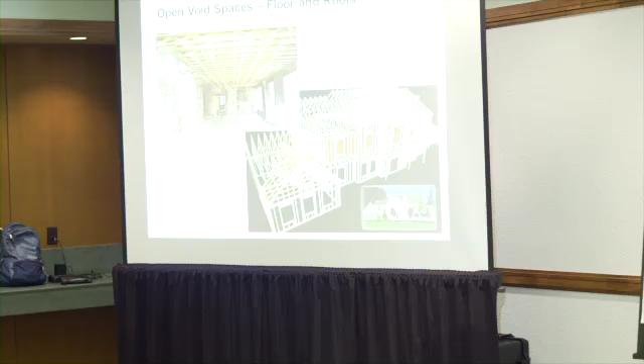You're going to see when the fire actually does transition from a content fire to a structure fire, it's got more fuel available to it in the void spaces, and it's got more air available to it in the void spaces because of the construction practices we use today. If you had a fire that used to start in the void, it would only have oxygen from one joist bay. Now it's got the entire void space to pull from.

But the thing that I'm more concerned with is not the fire that starts in the void space, because that's slow to begin with, but the fire that starts in the contents and spreads into the structure itself is going to take off quite a bit, especially if you look at how our attics work. You've got a whole bunch of fuel, you've got it in a peak shape, it pulls air in low and sends hot gases out high. If you were to build a campfire, that's exactly how you would build it, and that's how we build our attic spaces. That's why attic fires can be so challenging, because you've got a whole lot of surface area and a whole lot of ability to burn and to get air.

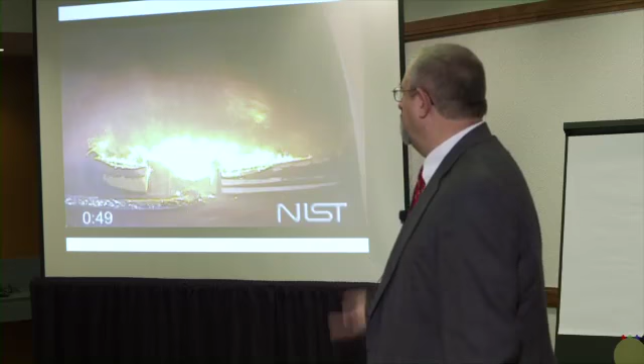Next, we're going to see the radiant heat transfer from the flames start to pyrolyze the sofa and the chair. So we have blue polyester covering on the chair, and you see it turn into a white vapor. That's raw fuel. That fuel's going up into the upper layer, the hot gas layer. The hot gas layer starts to burn. We have rollover. The radiation from that starts to pyrolyze the carpet and every other fuel that we have in there. It's going to entrain a lot of oxygen through the doorway.

There's going to be very turbulent mixing, and we're going to transition to flashover, and then that room's going to do what? It's going to start to darken down because it doesn't have enough oxygen inside to breathe. Where's the fire? It moved outside that open doorway to be an 8 to 10 foot tall flame outside that doorway because it can't breathe in there.

Heat transfer. So what were the conditions inside? What if you were inside that room? Could you survive? Probably not. Sometimes you'll hear people talk about this condition referred to as black fire. That's when the gases are hot enough to be flames, but they don't have the oxygen to burn, and they're getting pushed or moving through a structure.

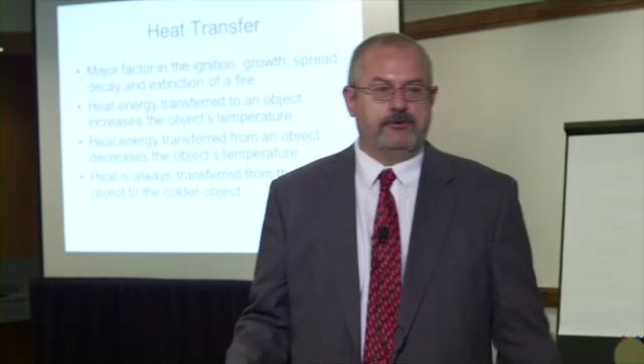So heat transfer. Without heat transfer, you can't ignite anything, you can't have fire growth. At the same point in time, if you put water on something, if you don't have heat transfer, you can't have the fire go out either. So heat transfer is very important. Again, basic physics. There's some laws of physics here. Heat transfer only goes in one direction, from hot to cold. Right? Mechanisms of heat transfer. Again, firefighter 1 type of stuff.

Conduction, convection, radiation. Conduction is heat transfer within solids. Convection is heat transfer between gases or between liquids and gases or gases and solids. So for example, when the fire plume goes and hits the ceiling and turns into a ceiling jet, those gases are rolling the ceiling. It's transferring heat to the ceiling via convection.

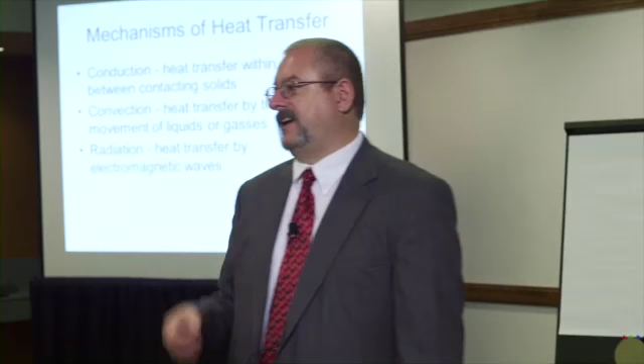Radiation is heat transfer by light energy, so you have to have line of sight. So if you're not directly between the emitter, whether it's the flame or the hot gases overhead, you can shield yourself from the radiation. Basically, if you're standing out in the sun and you step into the shade, right, you got out of the direct radiant light from the sun. Same kind of thing. Showing you a few, not all equations, but a few so you understand the process.

So this is convection. So that Q dot in scientist lingo is heat rate, heat transfer. And it equals a convection heat transfer coefficient, H, times the difference of T hot versus T cold. So in this particular case, T hot are the gases coming off that fire, and T cold is the initial wall temperature. And then the last thing we multiply by is the area of the target, or the area of the wall. Now that wall could be you in your turnout gear, right? You could be the target for that heat.

So one thing you notice right away is that Q dot is going to be bigger if the difference between T hot and T cold is bigger, right? So let's say you were 70 degrees when you went in there and the fire environment's 150 degrees, well, that piece in between would be 80. Well, if it's 400 degrees in there and you were 100 degrees by the time you got there, now our delta T is going to be 300 degrees. So you can see a direct relation there that if you go into a hotter room, the heat transfer between you and the hot gases in that room is going to be larger.

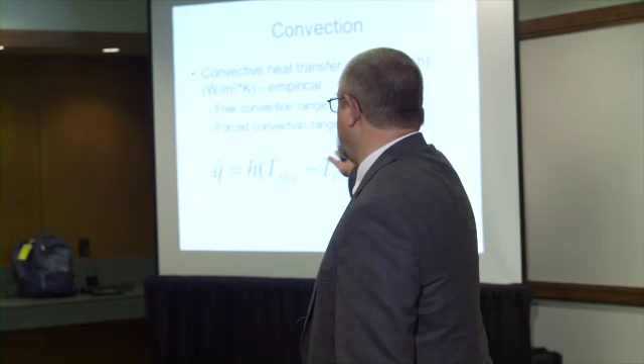So again, when we have forced convection, it could be anywhere from multiplying that delta T by 10, and 500 is sort of the rear end of a jet engine. So that's another extreme. But the key thing is, if that Q dot gets bigger, it's not good for you.

How else might we use this? This is a good thing to keep in mind. Let's say that you show up at a fire training event, and some person, could be an experienced person, could be a scientist you never heard of before, says, you know what, I think the best idea is when you've got flames rolling the ceiling, let's put the water on the floor. I'm going to show you.

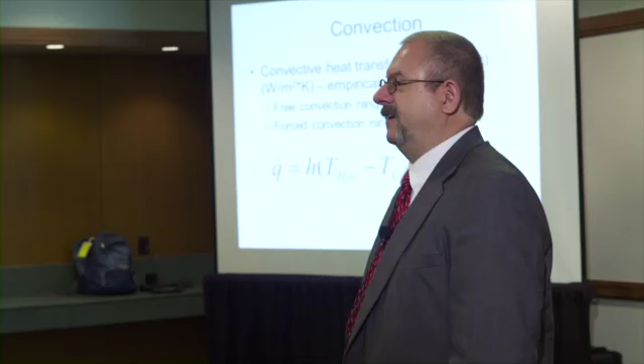We're going to go in this 20-foot sea tainer, and look, the flames are rolling the ceiling, and I'm going to get down here, and I open up the hose line, and the water goes on the floor, and the fire went out. And you might walk away saying, damn, fire went out. That's pretty neat. Well, that was in a sea tainer, right? Let's look at the physics.

If you want to increase your Q dot, if you want to increase your heat transfer, where do you want to put your cold water? You want to put your cold water in the hottest places possible. So if you've got 1,800 degree flames up here and 400 degrees down at the floor, where do you want to put your water to make the most sense? Right? Get it in the hot stuff.

Now, that said, if you've got a small room, maybe it doesn't so much matter where you're going to put the water. Just get the water in there, right? But just something to think about as you hear different things over time.

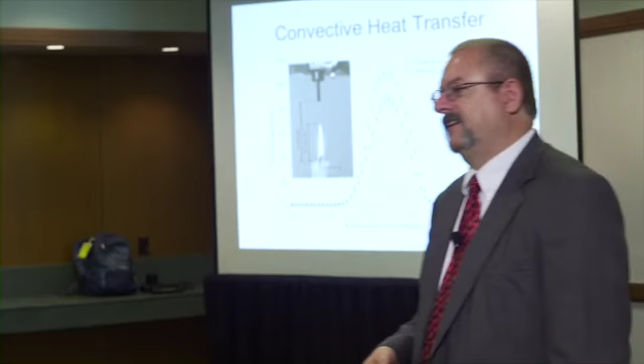Convective heat transfer, back to the candle. If we take a candle and we make a measurement over the candle, you see our sensor there is within about 1 inch of the candle flame. As we move the sensor over the center line of the candle, we're seeing 80 to 100 kilowatts per meter squared of energy, which is why you can light many things on fire with just a small open flame. Very close to it, right in its center line, has a tremendous amount of energy.

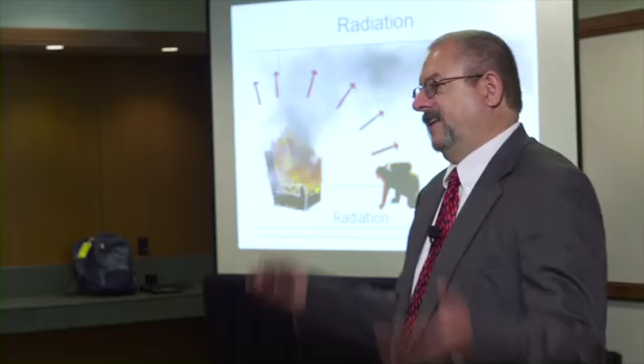So let's look at our threats, our hazards. We have an early growth stage fire showing there. There's an open door where fresh air is coming in behind the firefighter, and radiant energy, a little bit's coming from the chair and some is coming down from the hot gas layer. That's transferring energy to the firefighter.

Convection, again, early stage. This is sort of the ideal situation here, where the convected air that's coming in the door low is actually cooler than the fire environment inside, and that's helping take some of that heat that was transferred by radiation away from you. So that's a good thing.

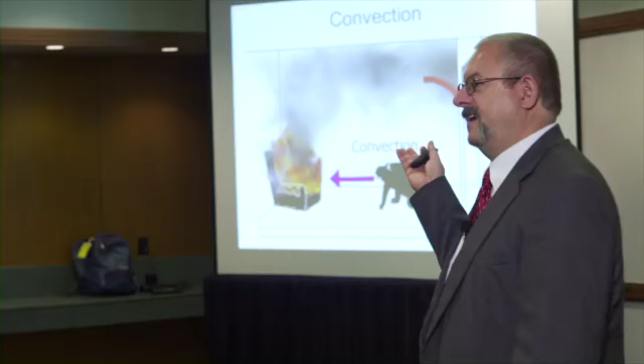But notice where the high heat, high pressure gases are exiting out the top. So one might imagine that if you were to be where the red arrow is, that could be bad, right? The heat transfer to you is going to be increasing. So if the hot gas layer comes down to where you are and is flowing over you, you're in trouble.

Conduction. A lot of times we just think about conduction being where you're touching something, your gloves on the floor or on a hot surface, or your knees crawling on a hot floor. But the other thing to remember is, how does your gear protect you? Your gear protects you by absorbing energy and storing it. And then what happens? The gear gets pretty hot. What direction does heat flow? Hot to cold. What's the next cold thing?

You inside the gear. So at some point in time, the gear that's touching and pressing against your skin is going to be conducting through that gear into your body. So when your gear's hot, the last thing you want to do is have it compressed against your skin.

If one of your fellow firefighters gets his trim on fire and you have this temptation to pat it out, to put the fire out, you're really not helping him, right? You're going to push the hot gear against the skin, make the burn injury worse. Cool them off. Throw water on them, get the gear off. You got to get the heat moving away. You want to change the direction of the heat from going to him to going away from him, somewhere cooler.

Firefighting thermal environments. In the green box there, on the bottom we have heat flux, kilowatts per meter squared, and that's the radiant energy. Vertically we have air temperature, which controls our convection heat transfer. So we've got convection on one side, radiant heat transfer on the other side. The key thing to remember is that these two sources of energy from the fire add up if they're absorbed in your gear.

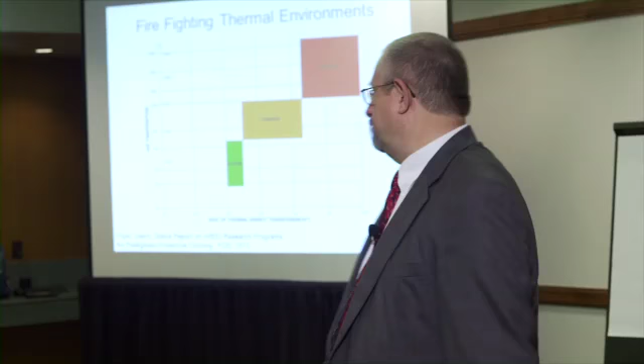So I'm going to show you a couple of films here. We have a chair that weighs 42 pounds. I've got 2 of them in there, polyurethane foam and polyester batting. And here I've got 1 window and 1 door to this compartment that's about 12 feet by 10 feet by 8 feet tall, and the door and the window are both closed.

You're going to watch the fire develop, you're going to watch the smoke grow, and just under the window you saw a couple of squares on the wall. That's firefighter turnout gear that we have instrumentation in.

So the smoke layer comes down over the firefighter turnout gear. What's happening to the fire right now? Starting to run out of oxygen. The hot gas layer is coming down below the level where the fire can entrain fresh air. So if we don't do something quick, that fire is going to go out.

It got hot, it started to build a little pressure, smoke started to force its way around the cracks in the doors. You see it pushing out there a little bit. So we're going to open the door.

The fire was still in the early growth stage, so as a result, what happens? Opening that door works. Hot gases are going out the top. High pressure hot gases going out the top of the door, and fresh air that's at lower pressure gets entrained, basically pulled in by the fire into the lower level.

What do you see happen? The smoke layer lifted, you could see exactly where the fire is.

I've slowed the video down to real time, and watch the lower right-hand corner, and we're going to start to see rollover. When you see rollover, you're going to notice the flames are going to go across, break the interior pane of the double pane window, but not fail the window totally. Notice that the flames are going to burn at the interface of the hot gas layer and move toward the door. They're going to move toward the source of oxygen.

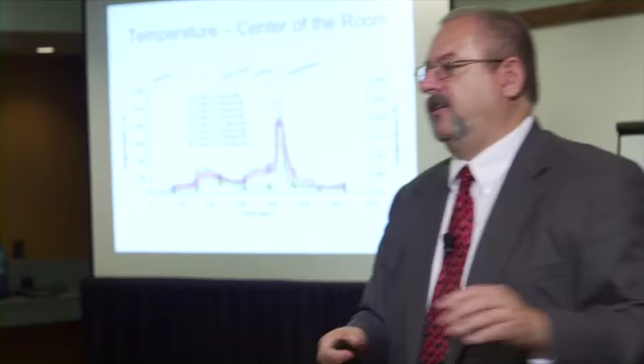Not very good. Notice how the temperatures drop off a little bit until we open the door. Now notice what happens to the graph once we open the door. The conditions separate, right? And you saw it in the video.

We once again have a hot gas layer and a cool lower layer. So the temperatures 3 feet above the floor and down, where you'd be crawling, are ambient conditions, 100 degrees, just as it was that day when we were running the test. That's the outside air conditions you'd be exposed to. And life is good, perfect working environment, fully encapsulated in your gear. You're well protected to work under those conditions, with a little bit of heat flux hitting you, less than 5 kilowatts or so.

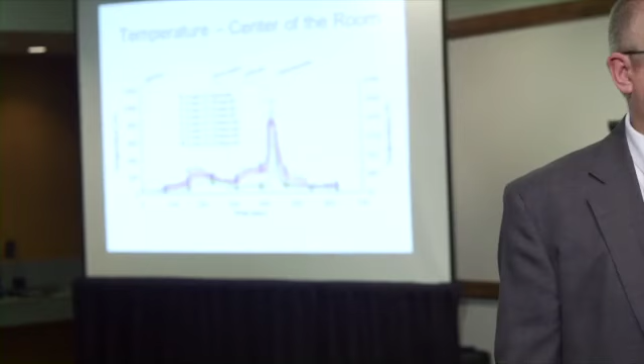Life is good until what happens? Until rollover. Once that rollover occurs and we've got flames rolling the ceiling, the radiation kicks up, the convection kicks up because the hot gas layer comes down, and you see how rapidly conditions change. We go from you being in a safe environment to you being in an untenable environment in about 20 to 30 seconds.

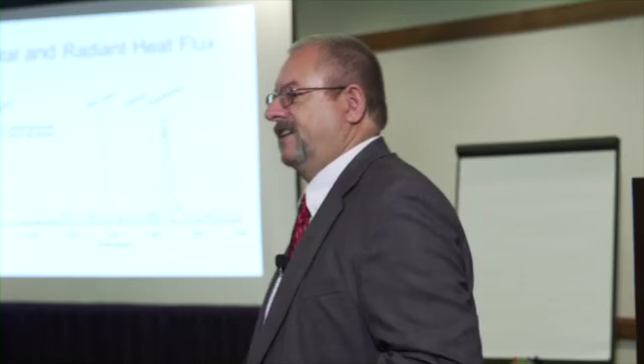So there's a measure of total heat flux, which is convection and radiation added up. That's the blue line, and the green line is the radiation alone. So we get up to 50 kilowatts per meter squared very quickly. Now your gear is tested to what level? Anybody know, in the TPP test? 84 kilowatts per meter squared.

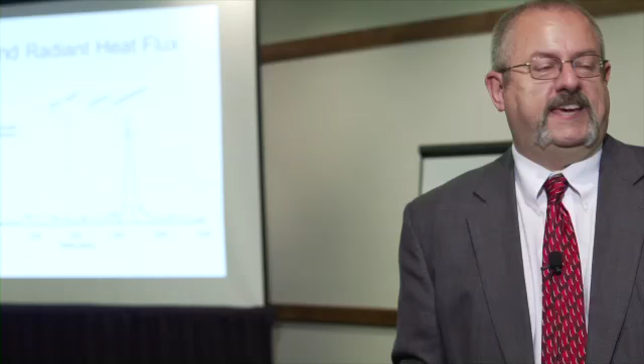Any idea how long you would be safe, or how long you should have before a second-degree burn injury with a TPP rating of 35, in theory? 8 seconds? In theory, it's 17 seconds, but if you assume it's compressed a little bit or dirty, or you got a little preheated before you got there, the key thing is you don't have a lot of time, right? You've got to be moving. If flame's impinging on you, you've got to be moving, and you can see how quickly those things change.

We've started out with an open door, so do you think it's going to go to flashover faster or slower? Slower because it's letting heat out, you think, right? Actually, it's going to be faster, right? Because it's got that continual supply of oxygen to feed the fire.

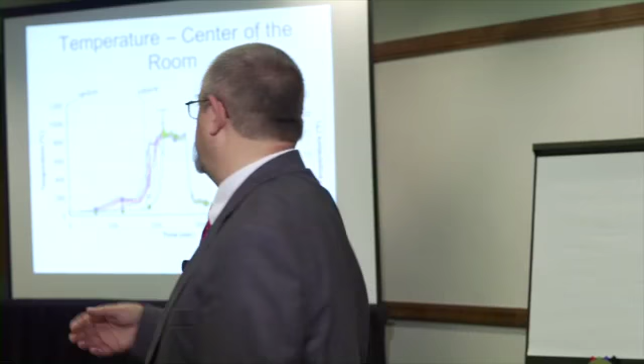So there we see our thermal gradient, our temperatures from the ceiling down to the floor. Initially, temperatures at the ceiling sit around 390 to 400 degrees. Near the floor, conditions are ambient until we have rollover. You see them rapidly increase until we reach post-flashover, defined as temperatures in excess of 600 degrees C or 1100 F, which also happens to be the auto-ignition temperature of carbon monoxide.

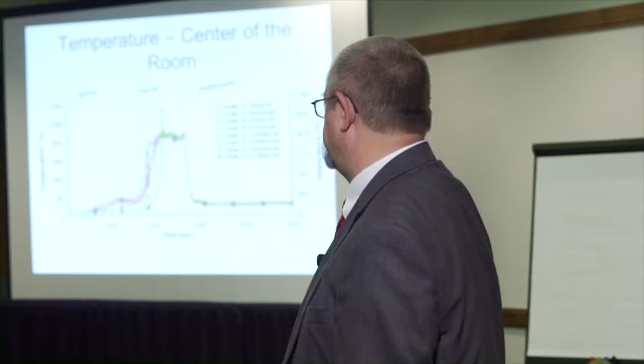So we're sitting at temperatures floor to ceiling in that space around 1500 degrees Fahrenheit. Notice introducing the hose stream from outside drops the temperatures very quickly to about 200 F. Heat flux, again, we're up to about 75 total heat flux. The radiant heat flux is up to about 30 because we allowed it to transition to flashover. The PPE temperatures, you're okay—the outer temperatures are below 200 degrees Fahrenheit. Inside the gear it's less until we have rollover.

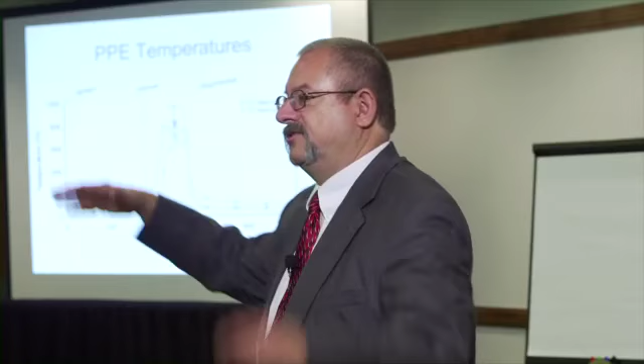So when did the hot gas layer come down over the turnout gear? At around 180 to 200 seconds. You can see it in the graph. As soon as those hot gases start impinging on your gear, your time of safe operating is gone. You need to be moving or changing the environment.

Flow path. So basically, flow path is the volume in a building—a series of rooms, hallways, corridors, or stairwells—that's between an inlet and an outlet.

I got some gray hair in here, so some of you might have been hot rodding back in the day. If you consider the fire structure as your internal combustion engine, with your inlet as the carburetor and your outlet as the exhaust system, if you wanted more energy, more horsepower out of that car, what did you do? First time you got your check from Safeway or wherever, you had to go get some hooker headers, man, and some glass packs. Got to let it breathe, right? Got to open up that exhaust. Got to get that Holley 750—you got to get that big carb on there to increase the flow path, make the engine a better air pump and fuel pump, and let it burn better.

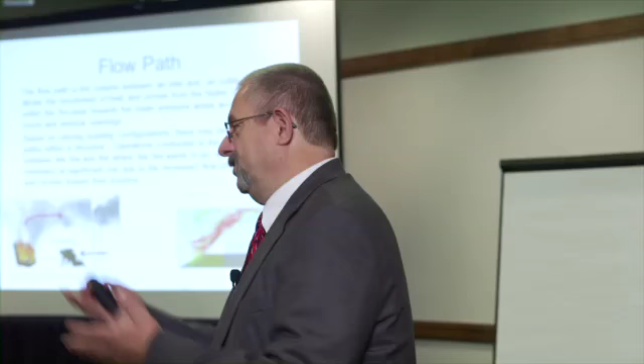Well, that's really what we're talking about here with the structure. Whether you use the analogy of an automobile or a wood stove with the damper controlling the exit of the flow path, and the front door where you're loading the fuel in—it's the same kind of deal, except now we're talking about structures. And when we're talking about basement fires, using that wood stove analogy, now you've got a wood stove made of wood, you're dancing on top of it, and you're going to open the damper and open the inlet and think things will turn out well. So that's really what we're talking about here.

So here's a wind-driven case, the first one I was involved with where flow path became a big issue—Vandalia Avenue in New York City. You look at the apartment building on the downwind side and the upwind side, and you see soot stains that are pretty similar. So one of the questions was, which of these, from outside, is the fire apartment?

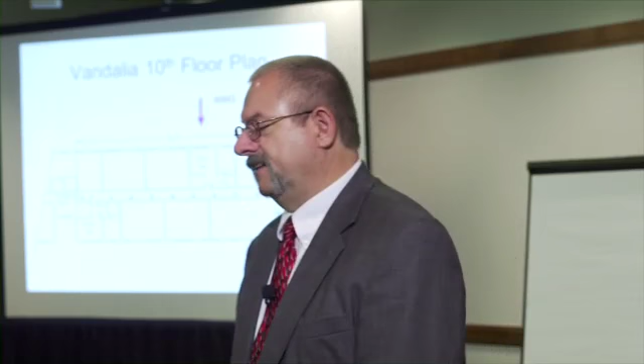Well, the fire apartment was on the upwind side, and a little old lady lived there. She just got new carpeting and was going to have a party, a little wine and cheese get-together with some of her neighbors—this was a senior living facility. The new carpet kept her front door open, which wasn't a big issue for her; it actually worked out for her that night in an odd way. The self-door closers weren't going to get the door closed because of the new high pile on her new carpet. And so the door was open.

Around 11:30 in the evening, one of her neighbors noticed she was relaxing on a sofa in front of these windows having a cigarette. About 4:30 in the morning, the fire alarms in the building go off.

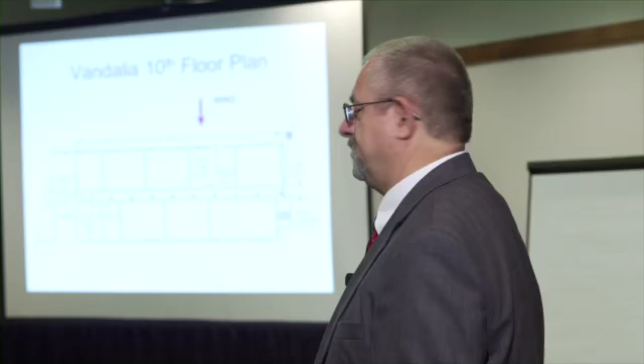There's a lady in the apartment next to the fire apartment, and she calls 911. She's in a wheelchair and needs to be rescued. A crew comes up the stairs, brings her out, and she's treated for smoke inhalation and released that day. There's a little old guy in an apartment down here.

He's getting some smoke in his apartment, and he doesn't like that. So apparently when he's had smoke in his apartment before from cooking or whatnot, what he did to get rid of it was open the windows. Now, this is the upwind side, high pressure, and this is the downwind side, low pressure. Just like hot goes to cold, high pressure always goes to low pressure. So when he opens that window, he creates a flow path, coming from the fire apartment down the hall and out his apartment. So he's getting more smoke in his apartment.

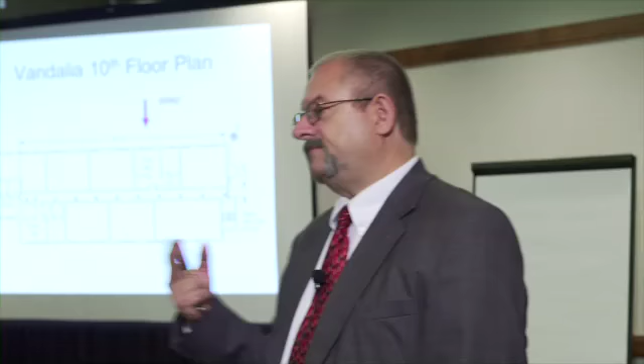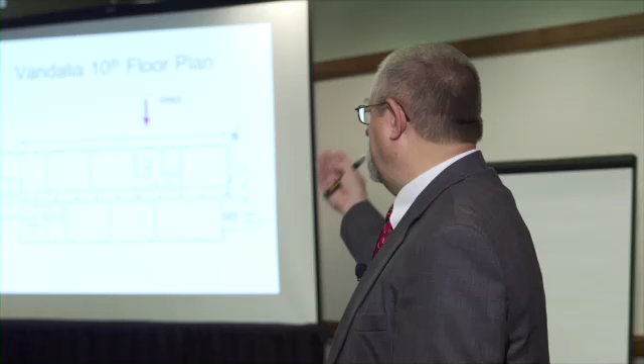Firefighters now open this door again, and as was the practice in New York City at the time, they would send their roof man up to open the bulkhead door and keep it open for the duration of the fire. The roof man was going back and forth telling them about a high wind condition, seeing flame pushing in and out of the window of the fire apartment. Because the bulkhead door is open, when this door gets open now, that's part of the flow path as well. So the first hose crew gets burned and can't advance the line.

Eventually they advance a 1.75 inch line and a 2.5 inch line down the hall, unfortunately not in time to save the other members.

This is what the hallway looked like between the fire apartment doorway and the attack stair doorway. This is looking from the front door into the apartment. Although it wasn't heavily furnished, it had a sofa or two, and basically a wood dining room set, lightly upholstered. It burned long enough to get back into the wall and pick up some foam insulation burning on the outside wall as well. It burned hot enough that it spalled the ceiling planks forming the ceiling of this apartment, so a lot of energy was released.

Before our fire dynamics simulator even had its name, we ran a model with it. The blue box represents the wind, and the fire apartment is right in front of the blue box there. This is the little old man's apartment, and then we have the stairwell on the opposite side. When the window breaks, the fire size is going to increase and smoke is going to start to move down the hall.

Because the roof man said the flames were pulsing in and out of the window, I assumed the wind was fluctuating. So when I modeled it, I had the wind go up to 20 miles an hour and then back down to 0. Every time you see a wind pulse in the model, flames and heat will move down the hall.

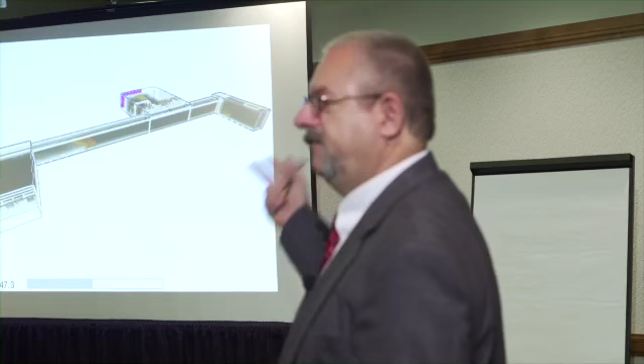In response to the mayday, the door to the stairwell is going to open, and then you'll see smoke and flames move into the stairwell as well, heading toward the bulkhead doorway. So plenty of fuel there. The flame could split. Even though it appeared vented from the street, there was still plenty of fire and energy that put these firefighters in jeopardy.

So 10 years later, we get an opportunity to run a project to really study this wind-driven fire phenomenon.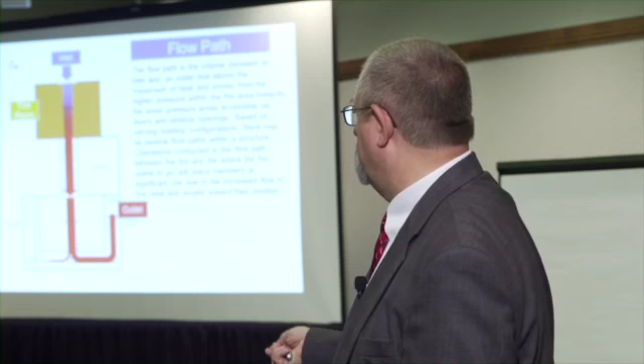As I described a little bit earlier in the class, we have this flow path where basically we have the bedroom, a hallway, a target room here, there's a hollow core door between the target room and this hallway, and then the living room and our outlets, non-flow side and flow side. I'm going to go through this again quickly, reminding you that you only need one piece of furniture to flash over, to have enough energy to flash over a typical residential scale room.

We'll watch this video again. So again, our fire starts here in the bedroom. We have our plume starting to impinge on the ceiling. Ceiling jet moves across the ceiling. Once it hits the walls and forms the hot gas layer, it starts to build up in depth and then spread down the hallway and into the living room. Notice that when it starts to flow out the doorway into this corridor, it's going to head for this vent, right? The flow is very directional away from the camera toward the vent, part of the flow path.

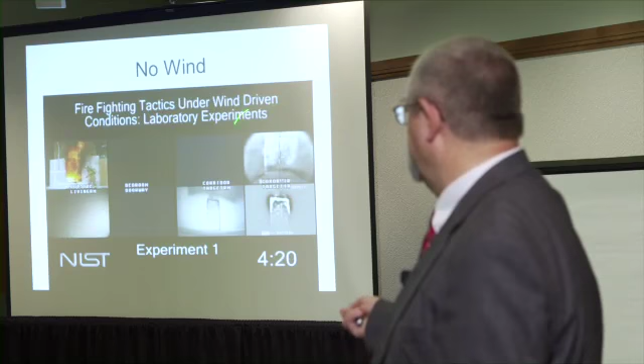Right now, if you were to get there right now and start to make an attack and work your way down the hall to get to the fire bedroom, this is sort of that old school early growth stage. You're there in time. It hasn't gone into a decay stage yet. But now that's transitioning to a decay stage. And as soon as this window, which might fail accidentally or might be ventilated as a ventilation tactic, look at what it does in that hallway. It's no longer a hot gas layer, cold layer environment. Now any firefighter that would be in that hallway is in that hot convective flow. Heat transfer to that firefighter increases dramatically.

We're going to watch the hollow core door fail. Interestingly enough, until that door fails, somebody would have a chance of surviving behind that door. So, from a victim's perspective, having a closed door, doing whatever compartmentation you can, is a big value. Notice how that flame is pulsing in and out. Now this is with no wind.

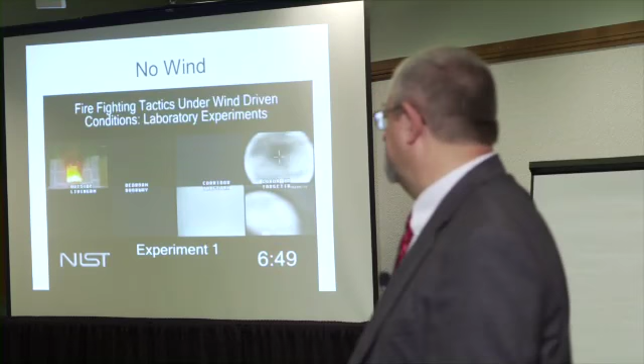So again, very dramatic increase in heat release rate. It goes from about 2 megawatts to 13 to 14 megawatts within 60 seconds. The bedroom temperatures: initially, we had over 1,000 degrees at the ceiling and about 500 degrees at the floor. Once the windows vented, now floor to ceiling, we're post flashover. We have a very well mixed fire going from floor to ceiling in excess of 1,100 degrees Fahrenheit, and it stays that way until suppression.

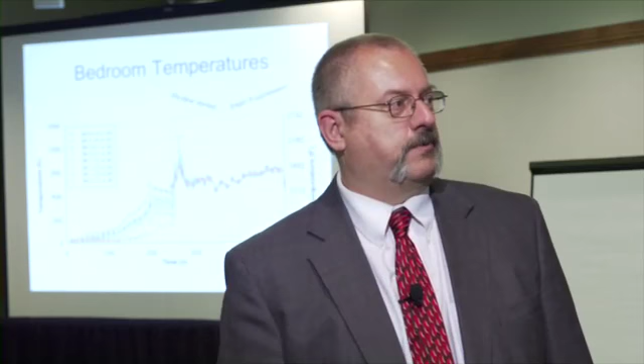The living room temperatures: so what's happening in the living room is there's not really a lot of fire in the living room. Why not? There's temperatures at the ceiling that are about 700 degrees. They're pretty warm. So what's going on is the temperatures and the heat flux in the living room are hot enough to start to pyrolyze the furniture and the carpeting that are in the living room. So gaseous fuel is being created, but it doesn't have any oxygen down there to burn. Then when we vent the window, it starts to pick up some oxygen, but it's still burning pretty inefficiently because, you see, we're not post-flashover yet. We still have a temperature gradient. Although now the ceiling temperatures are about 1,400 degrees Fahrenheit, and near 1 foot above the floor, it's about 800 degrees Fahrenheit.

When that door fails to the target room, the chunk of oxygen that's stuck in that target room gets pulled out into the hall, and that's what causes this increase in temperature here, and then we sort of transition to our flashover state.

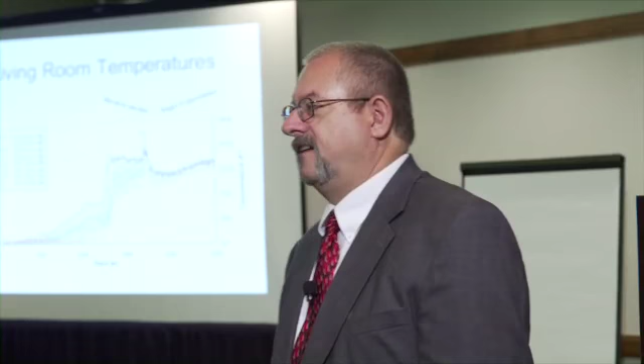The velocity in the hallway: high pressure wants to go to low pressure. So initially, with that window in place, we don't have this big exchange between high pressure and low pressure, and we just have the ceiling jet that's going across the ceiling at about 9 miles an hour or so. Once the window's gone, we have this well-mixed fire environment, high pressure in the bedroom, forcing its way to the low pressure in the living room, so the conditions in the hallway, floor to ceiling, are now somewhere between, say, 8 miles an hour and 12 miles an hour.

Right? So this is that H factor in that convection heat transfer equation that's increasing the heat transfer to any target that's in that hallway. Living room, gas concentrations at 6 feet. This is oxygen. The red line is oxygen. The yellow line is carbon dioxide. The sort of triangles here, this green line is carbon monoxide, or CO, and then this purple line are the total unburned hydrocarbons. This is the excess fuel that's still in the living room to burn.

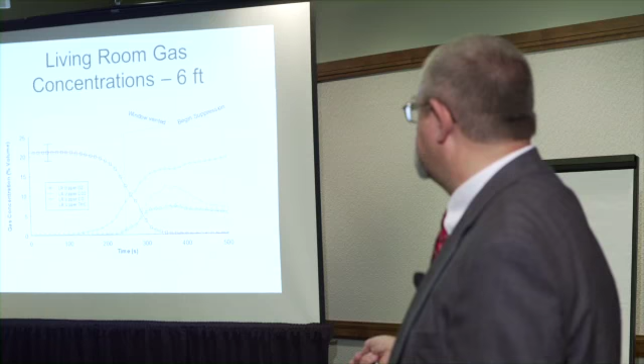So you can see the oxygen concentration went way down, CO2 way up, CO way up. So the CO is sitting at about 6%. That's 60,000 parts per million. So when you get to about 3% CO, that's one breath that will drop a person in their tracks, an unprotected person. What about at 2 feet above the floor in the living room? Well, we still don't have a lot of oxygen down there. Our CO2 is above 15%, and our CO is in excess, again, of sitting around 6%. So very unhealthy environment for all involved.

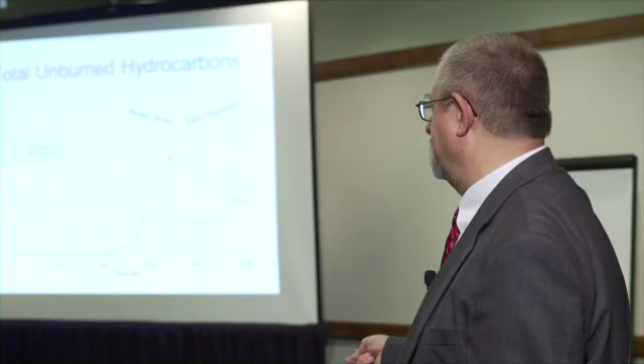Total unburned hydrocarbons in the living room, we've got about 12%. So again, there's more. If it just had more oxygen, it could burn those unburned hydrocarbons, right? The heat is there, the fuel is there, it just needs more oxygen to burn. So if you vertically vented that room, what would happen? It would burn hotter. The heat release rate would increase. If you broke an additional window on that room, the heat release rate would increase because it's got excess fuel to burn and it's already preheated, ready to go.

Now we're going to add some wind. So in this case, I'm letting you look at the inlet, which is the window, and the outlet, which is the door from the fire apartment to the corridor. I've got a 20-mile-an-hour wind, steady wind, hitting the side of that building. Notice that in the corridor we have a nice 2-layer environment, which are good working conditions for a firefighter. Look what happened when the window broke. Look at how rapidly that changed. This is playing in real time.

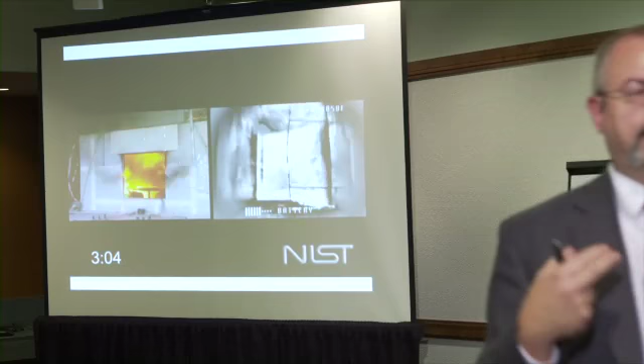What do you notice about the flames at the window, even though I have a steady 20-mile-an-hour wind? They're pulsing in and out, just like the roof man from Vandalia said. The key thing is we didn't understand it at that point in time. The pressure is so high in that apartment, it can't force it all out through the exit, so in effect, it's burping itself to relieve the pressure and then sucking back in the window.

Here's another case. In this case, the apartment door is closed. Right? So you'll notice that with the apartment door closed, this is having a hard time even failing the window, right? Because the pressure is bottled up in that fire apartment. So now we break the window. It's still burning very inefficiently. It's having trouble breathing. And the apartment door is providing protection. It's cutting off the flow path. You can see the leakage, and there's a lot of energy on the other side of that door. You can see that with the thermal imager.

Now the key thing here is, this might be the sort of situation where you get your crew, you'd have your line charged, and you say, okay, we're going to get low, we're going to pop the door, and we're going to go in. And that would really be a disaster because you see the kind of thermal assault you're going to take right in front of that door. And flowing a line, unless you can get the fire gases where they're originating back here, you're not going to have a lot of impact on that. You'd be much better off introducing water from this side, either with a high-rise nozzle or a wind control device to cover it, to cut the flow path, things that New York is working on.

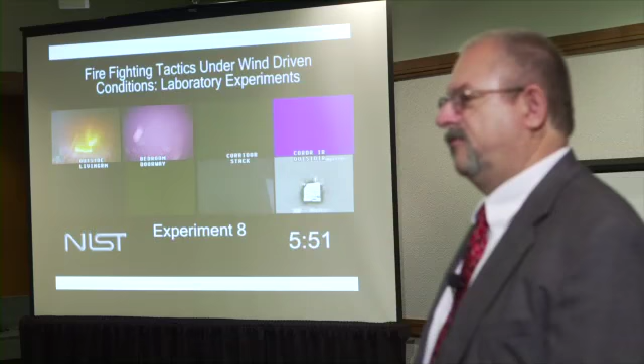So we're going to watch it develop. Everything's darkened down inside the apartment itself. We see some flames coming up into the stack, and now we're going to ignite the gases that are residing in that stack before they can get sucked up our 6-foot diameter hood. The fireman's getting ready to introduce some water at the window. There it goes. What happened to the fire in the hood? Gone, right within seconds. Now you look at the video view of the room and you say, wait a minute, there's still a lot of fire in that room.

Well, there is, but really you'll see as the bedroom view starts to improve for us that what we have now are a lot of incipient fires. We've got the remains of a couple of chairs in front of the window that are burning. We've got the remains of the bed that are burning. A dresser is burning. But what you've taken out of the equation is this reservoir of hot gases that was burning from one end of the apartment all the way out into our hood. Right? That's been neutralized, taken away just by this hose stream.

And you see the view is cleared up in the bedroom view. And then he stands up and knocks the rest of the fire down. So again, taking those fire gases out of play and bringing it back to the fact that you might have just a sofa burning or a chair burning or something like that, that's something you can go inside and deal with.

So then we moved into a high-rise, and we went to Governor's Island in New York, and we went there in February because it's cold and windy, so the weatherman says, and history says, about 90% of the time. The whole time we're pulling wires, putting up our instrumentation, loading furniture into the building, very windy, very cold. Then we got a snowstorm, still remained cold, but the wind stopped. So we brought our own wind, and we had the good fortune to have some squad guys take this fan off the back of the manufacturer's pickup truck and lash it to this boom lift, and we put it up 60, 70 feet in the air. So we had our good wind. Again, we're using real fuels. And then we start demonstrating things.

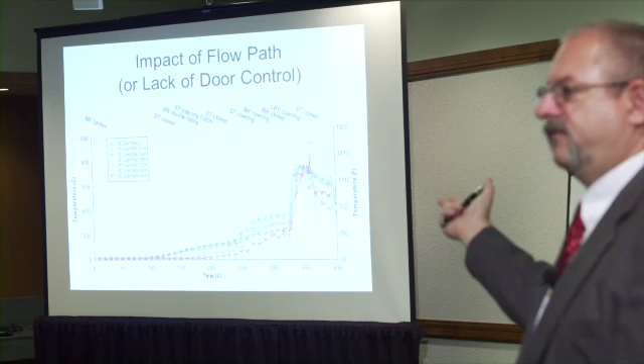Very rapid transition. This isn't just a high-rise issue. Single-family homes. Here's an incident that happened in Houston. Killed a captain, very experienced captain, more than 25 years on the job, as well as a young firefighter who was 30 days on the job, and this was their first fire.

The wind was coming from the rear of the structure, and there was so much smoke in the street in front of the house, and when the fire department arrived, fire sort of happened in the middle of the night, the engineer stopped because he didn't want to hit any parked cars. He wanted to get a better view of where he was going. And then he took the apparatus down the street past the house. They hooked up to a hydrant, and the lines start going in the front door on the low wind side.

Now, this was a very difficult house to gain access to the rear. Again, some confusion about whether people were in the house or not. In fact, the occupants were out of the house, and they had opened the garage door to the house to get their cars out. So again, another opening on the downwind side.

So here's the front door. The nozzle from the victims was found here. Their line went down the hallway. Their nozzle was found here. And the 2 firefighters' bodies were found in this location here, so they were well off their line.

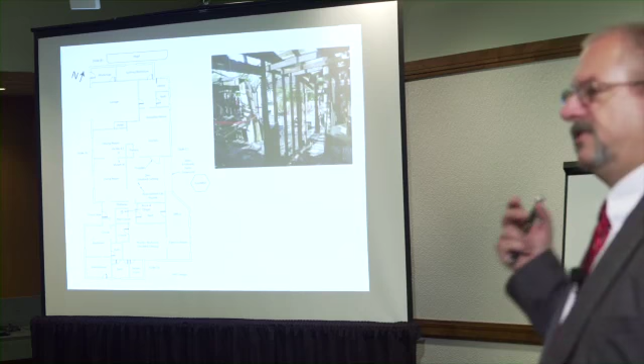Another engine company was in here. They were flowing water in this area here. They were hooking the ceiling, and as they were getting basically chased out of the fire by high heat conditions, they noticed that they could see these guys' boots back here, that they were still standing at that point in time. The big change in this case was, again, failure of glass.

There was a glass patio back here, and when it failed, that changed the flow path, right? That was our inlet, and the exhaust became through the downwind side. The fire had started in the attic. This was an older house, had been added on too many times. In some cases, it actually had a double roof, so there were asphalt shingles actually in the attic providing additional fuel. And you can see how it burned away there.

A ladder company was on the roof, and they made some cuts right in this area here. The ladder captain says as soon as they made their first cut, fire came out of it. They kept cutting and did a good job and opened up the space. And he said he looked to the rear of the house, and he noticed that there was a flame overlapping the eaves that was about 1 or 2 feet wide.

As soon as they were done with their cut and punching down the ceiling, he looked back again, and now he saw that that flame overlapping the eaves was about 20 feet wide. Well, that's because all that glass, solarium glass, had failed. So again, we're modeling this fire to try to get some understanding of what the flow path looked like and what happened. In our models, we include the roof vents. We try to get the whole timeline down for when they're pulling the ceiling and that sort of thing.

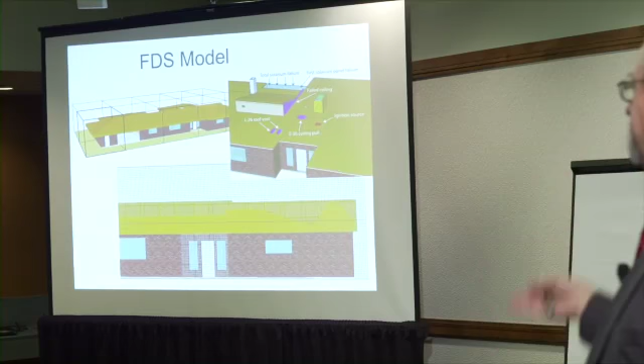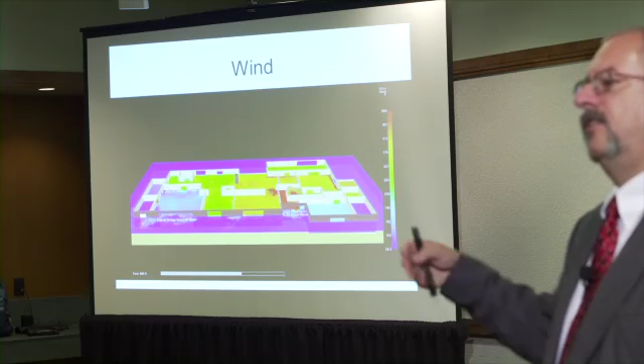So the front door is open. They open the door, and then what do they do? Well, you got to get your mask on, get your helmet on, whatnot. Again, this is an issue. When are you making the vent? Right? You don't want to vent till you're ready to take some action. Or if you're going to open the door and take a look and you see conditions aren't so good, close the door again. Right? Don't allow the fire time to build up by entraining more air.

So things are heating up. In fact, opening the door, you're going to see when they make the roof cuts right in the foyer area, it'll cool off a little bit. They'll get a little bit of lift.

So now the roof is vented. It cools off a little bit in this area. Things are working. And then the glass fails, and now you see where the heat's going.

So they couldn't stay on their line and follow their line out, probably if they wanted to. They went to an area that was not as hot. It just wasn't cool enough for them to survive.

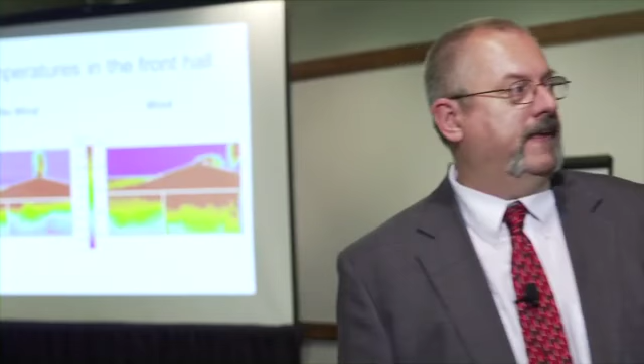So this is a side view looking at the front entry. The view on the left is before the wind is impacting it, so you see it's cooler close to the floor—you could crawl in and under there. Once the wind is blowing through the house, it's dropping the heat, mixing it toward the floor. You can't get low enough to get out of the thermal flow.

Perhaps more importantly is the velocity of that hot gas. Before the window breaks, 3 feet above the floor or so, fresh air is being entrained inside that front door, bringing cool air into the house, also feeding the fire. But if you're in the location of the doorway as a firefighter, it's going to help you—it's going to help keep you cool.

Once the glass breaks, notice what happens. The flow reverses and hot gases are coming out at that same location. Again, no escape.

So wind—keep the wind at your back, stay upwind. Otherwise you're literally putting your crew at the mercy of whether this glass, which is less than a quarter inch thick, is going to break while they're in there, or whether somebody from another company in an uncoordinated manner makes a vent and puts them in harm's way, puts them in the flow path.

Again, just a top-down view. This is the direction of the wind, out to the front door and out through the garage. So they couldn't go this way, they couldn't go this way—there were security bars on the windows here. They got to the best place they could and couldn't get any further.

Again, you'll see where the flow path is because that's where most of the burn damage will be, because that's where the oxygen's mixing with the fire. So it brings us to some questions about ventilation: can you really vent enough?

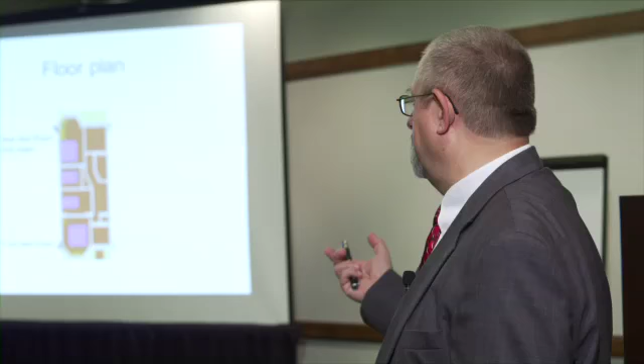You can see that in the rear room, the fire had been burning for some time. It failed the gypsum board ceiling, it got up into the cockloft space, and it had heavily charred the wood joists that were supporting the roof. Again, the worst place to have fuel is in a place where it can't really burn very well. It just pyrolyzes and creates a tremendous amount of unburned fuel. So fuel at the ceiling, the hot gas layer is there. The hot gas layer is oxygen depleted already, and that's creating a lot of fuel to move elsewhere.

Here's the front room where the firefighters sustained their injuries. Again, it went to a post-flashover condition, but as you can tell from the lath still being in place, not for a very long time.

This is the stair where the line was brought up. And this window, again, you see we had bidirectional flow in the window. Hot gas is out top, cool gas is going in, which aided in Rob Weedman surviving. That the fresh air was coming in to cool him off. What little benefit that was, it was still some benefit. It helped. He got his face out the window, so his face piece remained pretty much intact with just some small damage to it.

So again, we put in our model, we developed the timeline. Again, we're following from what we have from the Fireground radio and the radio traffic. So basically, before ventilation, we've got the fire here in the rear upstairs. After ventilation, you see that the smoke layer in the stairwell went up, but now we have flames at the ceiling, and we also have flames through all the bedrooms here as well.

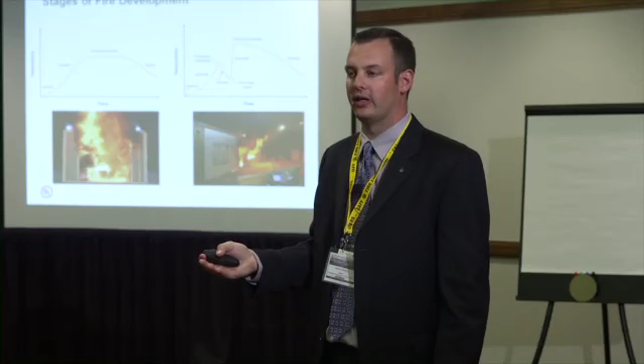Stages of fire development - Dan hit on this morning. We have to consider air into our stages of fire growth. And ultimately, this is pretty simple. We're going from ignition to growth. The fire runs out of air, starts to decay - our initial decay period. An opening gets made, let's say the front door gets opened. The fire responds to that oxygen and the fire takes off.

All right, let's step it up a notch. Two things are happening: the front door is getting opened and a hole's getting put in the roof. That's what that looks like. The fire grows, it goes into additional decay. Front door gets opened, provides air to the seat of the fire, fire increases in size.

But again, it hits a limit, right? It's only getting air through the front door. It wants to burn more than the air it's getting through the front door, but it's limited, it's fully developed.

But then we go ahead and we open the roof. So now what are we doing? Well, we're allowing more air to come in through the front door, so our fully developed energy is actually higher. So now we've got fire coming out of the roof and fire coming out of the front door, and that fire still has more fuel. You make another opening, it's going to step up again until you interrupt it with water.

And that's what's happening at the back end here. Hose line goes on the fire, we go into the decay stage, and we go ahead and put the fire out.

So that's just two actions on the fireground, or what the fire growth stages look like, for opening the front door, opening the roof, and putting water on the fire.

Had an incident in Prince George's County. Won't go into too much detail on this, short of saying small house, little to nothing showing, very small fuel load in the house, an issue with the hose line causing a delay.

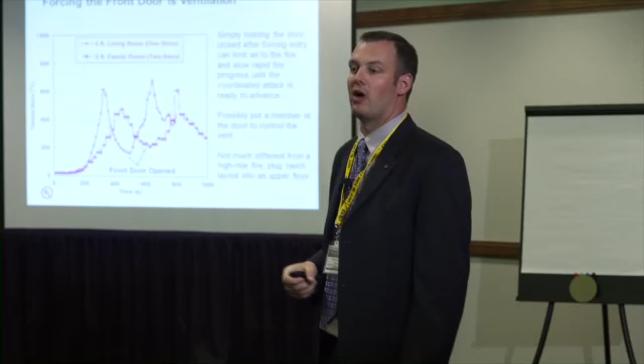So that leads us to start talking about door control. If we can limit the air that's making it to the fire until we get water on it, then we're doing positive things. We're not allowing that fire to grow.

Here's a short video that shows that not controlling that door until you have water ready to go will result in a bad outcome. The fire is not waiting for you. And there she goes.

How many times do we see chief officers show up on the scene, get the front door open, or the occupants leave the front door open? And we assume that, man, they saved us the issue of forcing that front door. It's wide open already. We do our 360, and while we're doing that 360, that door's wide open, feeding air to that ventilation-limited fire, allowing it to increase in size.

If you can limit that air, I'm not saying don't force the door and check for any occupants that might be inside the front door, but until you're ready to actually go and commence your attack on the fire, you need to limit that air.

So we looked at the concept of door control. We did two experiments side by side, where the first one, door all the way open, what we would normally do, chock it open, it's all the way open, line goes through the front door. Second one, we opened it all the way to allow the crew to go in, and we simulated having a guy at the door hold the door closed as he's advancing line that closes the door about two-thirds of the way, so that line can run straight in.

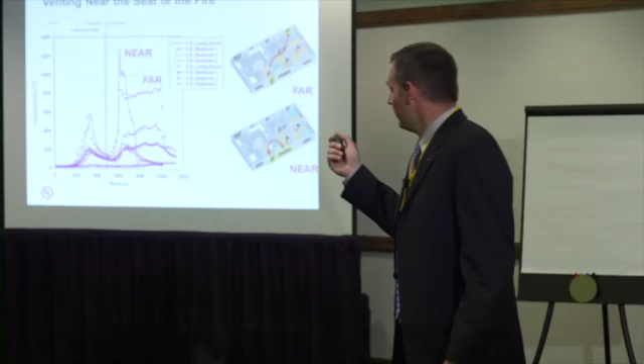Venting near versus venting far. Here's another one. We always teach you vent near the seat of the fire. Why is that? Well, because it lets the bad stuff out quicker, right? The caveat that they forget to leave out, and then we commonly don't address in our training, is that venting near the seat of the fire is good if you're putting water on the fire. If you're not putting water on the fire, venting near the seat of the fire is the best way to make the fire the biggest, the fastest, because you're giving it the oxygen right where it wants it. So if you want to take a fire that is ready to go to flashover and really make it flash quickly, give it air right near it.

Or if you want to spread the fire to the other part of the building, go ahead and vent far. It's going to take longer for it to happen because you're going to have hot gases that are going to roll the ceiling, go to the low pressure that you created, right? Fire's a pump. It's creating a high pressure. Anywhere you create a low pressure to the outside, that's where those hot gases are going to go. So the hot gases are going to travel out the vent.

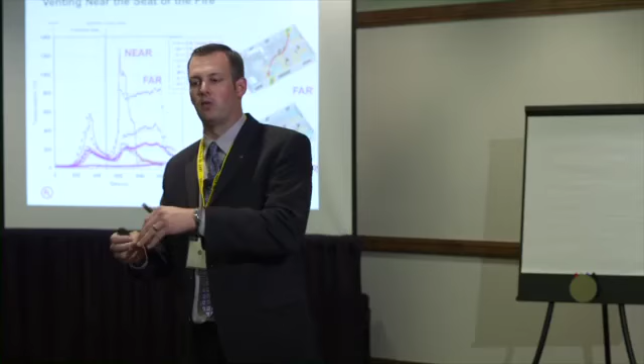As soon as the temperatures get hot enough in the room that they're leaving to ignite something, that room will quickly go to flashover. And then you successfully move the fire from one room to the other room. If you're putting water on the fire, venting near the fire is the best thing because you're taking the hot stuff, the high pressure stuff, moving it to a low pressure, and getting it out of the house as quickly as possible, which makes your job easier.

Reading smoke. Here's another one that maybe is not so obvious, right? So we get a fire inside a structure that's creating a high pressure, so it's pushing smoke out of every crack it can possibly push smoke out of, to a point. And that point is when the fire runs out of air and begins to decay and the temperatures go down, the pressures in the structure actually go negative. So it might be 500 degrees inside that house. It's going to have a negative pressure because it's trying to suck oxygen from anywhere it possibly can.

In the grand scheme of things, these are things that we would interpret as backdraft conditions, where you see some smoke pulsing in and out, and then all of a sudden, you've got nothing showing whatsoever. So the message here is, if you get on the scene and you've got nothing showing, don't get complacent. If you've got smoke in the area, you may have a fire that was in the growth stage, ran out of oxygen, went into the decay stage, and it's waiting to get opened up.

And the moment it gets opened up, it's going to get the oxygen at once. And because of the timelines we're dealing with here, you're not going to get a backdraft. You're not going to get an explosion unless it's been burning for a really, really long time. But air's going to go in, fire's going to grow, it's going to go to flashover.

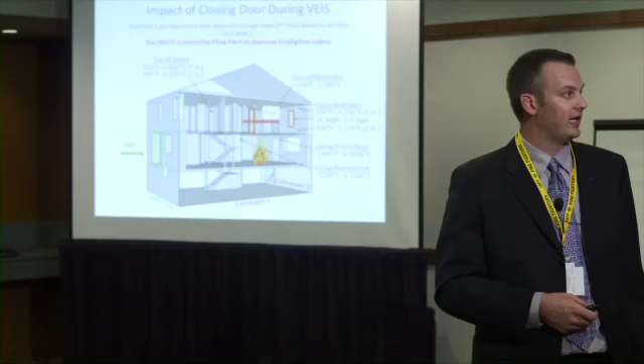That takes a lot of time, and those of you that have practiced it know it takes a lot of time. You don't have a lot of time, so you need to maximize the time you have to get that door shut. This just shows the impact of closing that door. And you can see here that in the open bedroom, we take the ceiling temperatures from 450 to 150 immediately after shutting that door. The flow goes from 12 miles an hour to nothing.

Dan talked earlier about convective flow. That 170 at the floor with a 12-mile-an-hour wind feels a hell of a lot worse than 170. But with 0 miles an hour and 120, you're now talking something that you can operate in. Best chance of victim survival and firefighter survival is behind a closed door.

You could have, and Dan and I have seen this on many experiments, you can have the entire front half of a structure absolutely blowing fire. And if somebody's behind a closed door, let's say on the CD corner, there's a chance that there's a savable life inside that room. They put a closed door between them and the fire.

Same thing happens if everything goes to crap on you guys and you find yourself having to bail out. One of the best things you can do to buy yourself time is to get a closed door between you and where the fire is. Takes you out of the flow path, allows the room that you're in to actually ventilate and allow the smoke to lift. And if you get to a window, you actually have time until that door burns through to have someone get a ladder to you and allow you to go out through that window.

We've got a number of cases where firefighters have bailed out through windows on upper floors, and the thought of closing a door wasn't in their head. They're thinking, this is so bad, I got to get out that window. And I've never been in that situation, but I can imagine the last thing you're thinking of, unless you train on it, is getting a door shut.

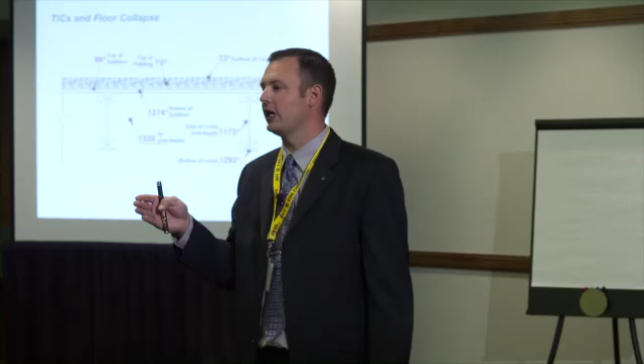Thermal imaging cameras, not an X-ray device. They're a surface temperature reading device. If you get onto the first floor and you think you're going to see that you have a fire below you simply by scanning the floor, unless there's a penetration between the basement and the first floor that hot gases are flowing through, like gaps in the baseboards or HVAC vents that burn through, your thermal imaging camera is going to tell you that it's 73 degrees on top of the carpet, even though it's 1,300 plus degrees in the basement.

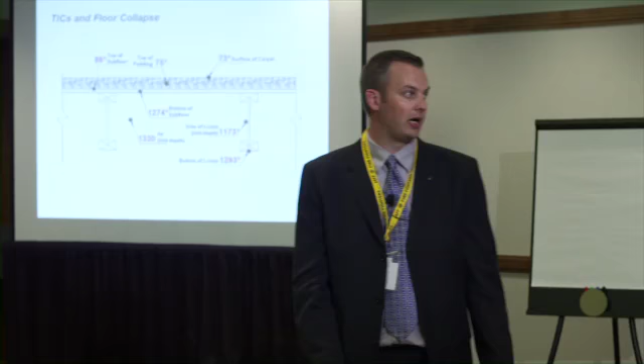Wood, carpet, hardwood, tile, all these things are very good insulators. They're very good at hiding heat signature. They're going to hide the signature from your thermal imaging camera. Here's an example that shows you there's a fire underneath this floor, and this is just a training exercise that got set up. He's going to go ahead and make a hole, and now you can see that there's high temperatures below that floor. You couldn't see it until he made that hole.

And I'm not advocating that you take a pickhead axe and make a hole in front of you on every fire. Chances are you're not going to make it through the 1 inch of hardwood and the 1/2 inch OSB and everything else. However, you could see that you couldn't tell there was a fire there until the hot gases could travel through, and then you could see that there was a fire there.

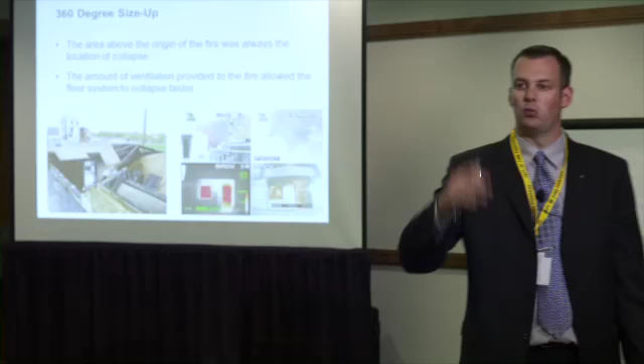Size up is, we can't emphasize size up enough. First place to collapse was where it was getting the most ventilation. You would see that with a size up, understand what level the fire's on. We've got too many line of duty deaths where they didn't complete the 360, they didn't know what level the fire was on, and that changed the outcome.

Ventilation and flow paths. If you're not going to die by falling through the floor, the next chance of dying is being in the flow path between the fire in the basement and the first floor. How many people have made it down the stairs into a basement fire and put a basement fire out? I would hope a lot of hands go up, right? We've been very successful doing that. But do you know why?

Either the fire was small, it ran out of air so it wasn't that big, the basement wasn't ventilated, so it was kind of like holding your thumb on the end of the straw and didn't allow the flow to come up past you because there was no air low. These are important things. You might be a piece of glass or one door being forced away from being caught in a flow path between the basement and the first floor.

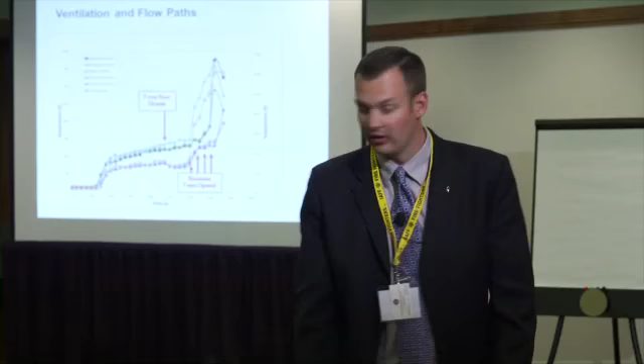We had a couple of brothers, Cherry Road in Washington, D.C., a couple of brothers, San Francisco, Diamond Heights fire, where they never opened up their hose lines. They got caught in the flow path above the fire or between where the fire was and where the fire wanted to go and got dropped and didn't get back up because a vent occurred on the floor below them while they were trying to find the basement stairs and make it down the basement stairs, and this is what the temperatures did. They went, in this scenario, from about 250 to 1400 just by making some vents in the basement.

And I think the common conception is, well, I'm going to let the hot stuff out of the basement, and if I let the hot stuff out of the basement, things are going to get better on the first floor. The opposite happens. Those basement stairs are the low pressure. That is the chimney. That's where the flow wants to go first. It doesn't want to go outside. It wants to go up and out through the front door. So if you give it that path, that's its primary path. You can't make enough openings in the basement to localize the fire in the basement. It wants to go up the interior paths.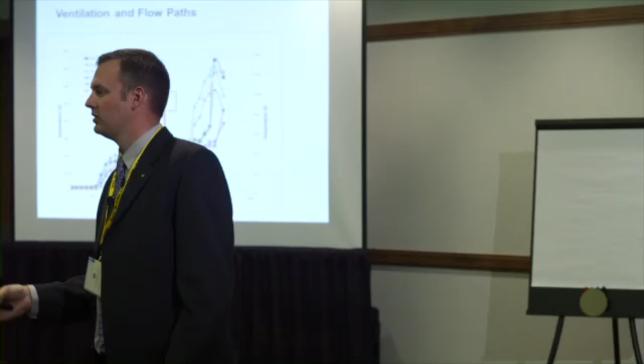That's extremely important. You never want to have crews trying to make those basement stairs and make basement vents on them if the fire responds to the air and that's not well coordinated, they're probably not going to make it.

Here's an example. Fire in the basement, flow path to the front door, and you all know how hard it can be to find basement stairwells in zero visibility with renovated houses. It's hard to coordinate those things.

Just the hot gases following the flow path going to the low pressure. You saw it's venting out of the basement. That's not enough. It's not going to localize the fire. It takes over, goes up the stairs, up the first floor, or up through the vents, and flashes over the first floor.

Here's the two fires I talked about, one in 1999, one in 2011. I'm not going to go into details, but there's been reports on both of them, and I suggest that you have a look at both those incidents.

Well, let's talk about protecting the stairs. We're going to go ahead and we're going to flow 180 gallons a minute out of a 15/16 smooth bore at the top of the stairs. It's ideal. We're putting all 180 gallons into that stairwell. We are showering and creating a giant water curtain going down the stairs of this townhouse.

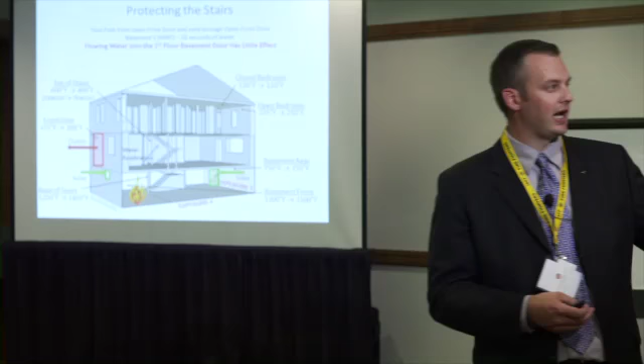So what's that look like? Well, you cool the temperatures at the top of the stairs from 600 to 400, and it's really about the victims, right? Or it's about the firefighters that you're protecting up the stairs. It went from 225 to 210 on the second floor. Is anybody going to notice a difference between 225 and 210? No.

And the important piece was to watch your back. In all these scenarios, the kitchen collapsed behind where the simulated hose crew would have been because the fire got up into the pipe chases, got up into the cabinets, ate away at the floor, caused a flashover in the kitchen, and collapsed the kitchen into the basement.

Here's what that looks like. That's where the kitchen was. That's where the hose line had to go.

So you actually have a low pressure behind you. If you're operating above a basement fire and you think the only place the fire is going to extend and harm the search crew is up through the basement stairs, I think you're fooling yourself. There's a number of avenues that fire can take.

It could come up through a heat register underneath a sofa and flash a sofa over in a room that you can't see that's not right at the top of the stairs. And if you've got limited visibility because there is no neutral plane on the floor you're on, you probably have smoke to the floor, you may not see those things until it's too late. So if all your focus is on that doorway, you can get yourself into trouble, especially the longer you're there.

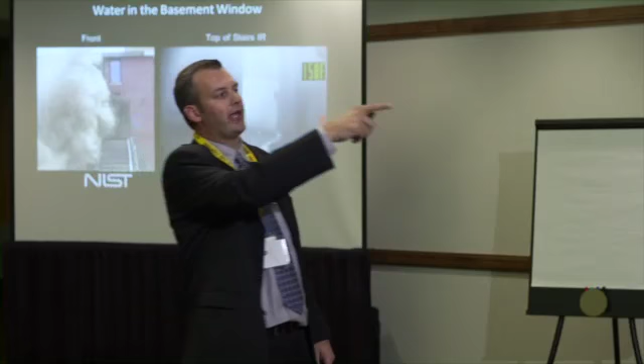So what happens if we put water in the basement window? This is about the time that I had 10 FDNY chiefs crowded around me watching that thermal imaging view, waiting for a giant burst of heat and fire to come up those basement stairs. Because that's what we think, right? We think we're going to push the fire into the structure and up the stairs.

So in this scenario, they flowed water longer than they probably needed to, but you can see that there's no giant heat push up through that interior stairwell. There wasn't a huge increase in flow coming out through the front door. And I think the reason for that is what we see in the temperatures.

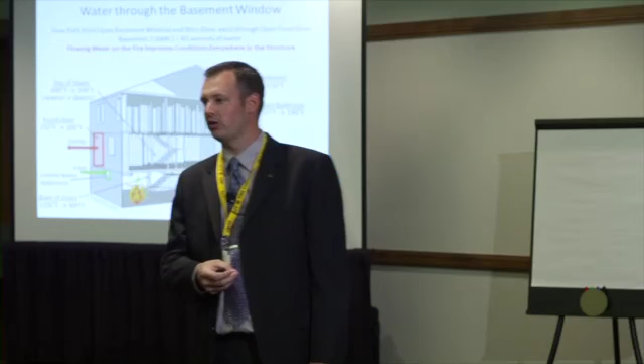We always teach that water expands 1,700 to 1 and creates a lot of steam. The piece that we don't focus on too much is how much the gases contract when you take them from 1,700 to 300, 800 to 300, 1,200 to 400. That many hundred degrees of temperature drop will contract the gases.

So you don't get a giant burst of steam and heat and smoke up to the second floor. And even if you did get some steam going up to the second floor, look at the temperatures at the top of the stairs: 600 degrees to 200 degrees. So you're seeing a dramatic decrease in temperature. The bedroom on the second floor, remember before it went from 225 to 210? It went from 225 to 190.

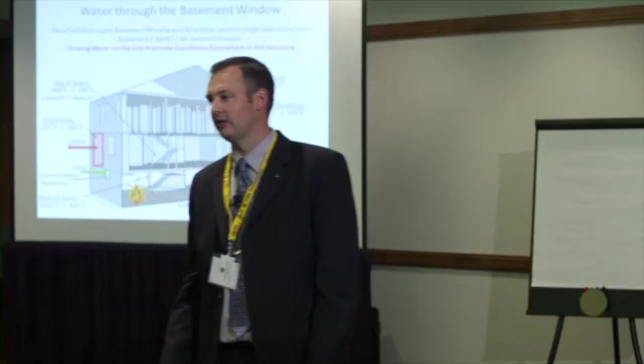Now, because you have the upper hand, you can vent that second floor and not have to worry about making it a low pressure and being in the chimney, because you now have the upper hand. You can vent the heck out of that place because you have the upper hand. You're letting more out than that fire can create. So more operations can happen simultaneously because you have the upper hand.

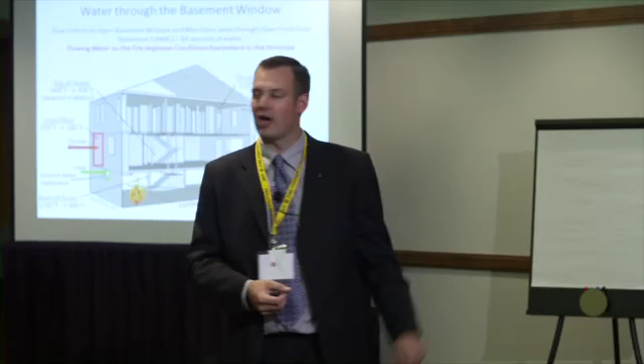Another important piece is that you flow water at that window to knock the fire down, not to put it out. You got to get inside and finish it off. If you flow water for 15 seconds and knock all the gases down and the fire goes back to the contents, and you just sit there and think you're done, the fire will come back. Because you're not putting water everywhere, stuff is still burning. So if you don't get inside and finish it off, it's going to come back.

We did the same thing on the first floor. Fire in the kitchen. What would happen if, as the truck crew is forcing entry into that front door, the engine crew gave the kitchen a shot for 10 to 20 seconds off the ceiling before they went inside? Well, the traditional thought is that I'm going to push all the heat and hot gases into the structure downstream. But you got to remember, there's not a low pressure back there, so there is no flow path that those hot gases can go to. The low pressure is the kitchen window, which is why the fire's coming out that window in the first place.

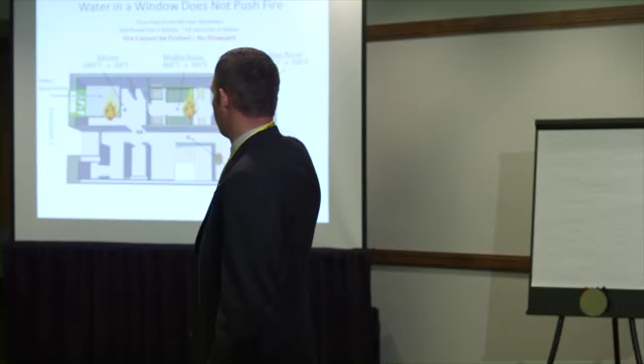Here's what the temperatures look like. The kitchen dropped by 1,200 degrees. The middle room, which was also on fire, that's where the fire started, went from 600 to 300. And the rear room that had no fire in it went from 500 to 300. There wasn't a push, and that's 14 seconds of water. We're looking at those temperatures immediately at the end of that 14 seconds. Did we see a burst of heat go downstream? We didn't see it.

What if you softened the target on the second floor? What if you went ahead and hit it before you went through the front door? Three feet off the floor in the hallway, using 25 gallons of water at a flashed over bedroom, fire coming out of the bedroom, hallway door open from that bedroom. What if a victim was laying on the floor outside that bedroom? Well, that's what we looked at: 10 seconds of water, 25 gallons, tight stream off the ceiling immediately where the water is needed, right in the compartment that's on fire.

The fire doesn't know whether the water is coming from the interior door or the exterior window. If it hits the ceiling and puts out the gases of what's flashed over, the low pressure can remain the low pressure. The window can still be the low pressure. Hallway temperatures drop from 273 to 104 in 10 seconds.

If you did that and immediately followed it up by going inside, and you trained on it and you could do it quickly, is that delaying the safety of the occupants inside the house? Something to think about.

Four points to consider. Just like any tactic, there is a right way and a wrong way to apply water from the outside, depending on what you want to do.

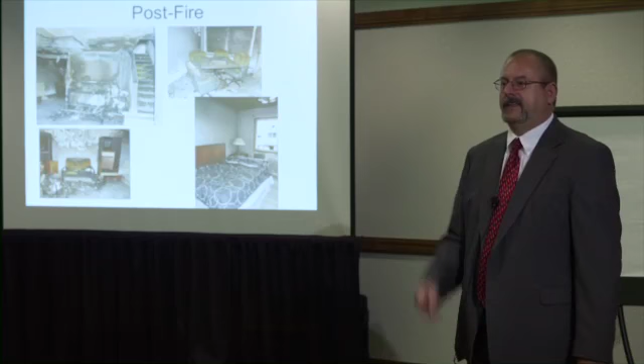Did these chairs, were they on fire back in the kitchen? No, they pyrolyzed. They cooked off some fuel, but there was no oxygen back there for them to burn. If we wanted to get those chairs on fire, what do we need to do? Send a truck company around the rear and break the kitchen windows.

So now in this case, same kind of deal. We light the fire in the same place. We're going to leave the door closed. And now when we open the front door, we're going to follow that very quickly with a firefighter with a pike pole taking out that front window. And watch how fast things transition.

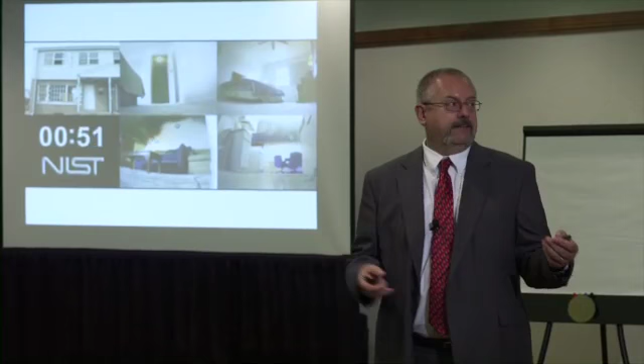Again, knocking it down from the outside. I'm going to let you see the whole thing again, so now you can watch the smoke move upstairs. And what you're actually going to see as you watch this is, as it starts to darken down in the lower level, it's going to be picking up oxygen upstairs. The flame is going to move up the stairs, and then you'll see a glow and flames for a short period of time in the front bedroom before everything darkens down.

So again, I think the general public doesn't realize all the time how rapidly smoke spreads through a house when doors are open, or how rapidly this hazard builds. So you see the flames coming up in the bedroom. That's sort of when the push out the front windows is at its peak. Now the flames are gone. The fire's darkening down throughout the structure. And we're going to see the smoke stop when it's actually pulling back in the window at this point.

Opens the front door. You see that tunneling effect that was mentioned before, that fresh air, that gravity current being pulled in, that oxygen adding to the hot fuel and increasing the heat release rate. And then within that 80-second time period, transitioning the living room to flashover. Again, fuel in the kitchen, was it on fire? Nope, there's no oxygen back there. High pressure area with no oxygen. We can't push the fire with a hose line, and we can't get it to burn because there's no oxygen back there. Again, we have the up and down like we had before.

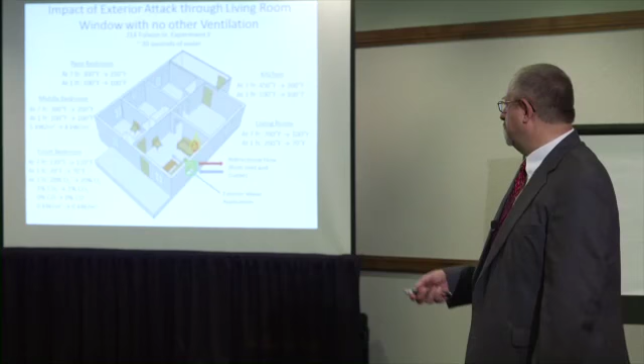Then we apply water through the window, and what happens in the front room, it goes from 700 degrees to 100 degrees near the ceiling, 200 degrees to 70 degrees at the floor. The rear bedroom, temperatures don't change much. Again, now's the time to vent those windows and let cool air in, or vent the front door, let some cool air in. The front bedroom has stayed tenable the whole time in terms of gas concentration and temperature.

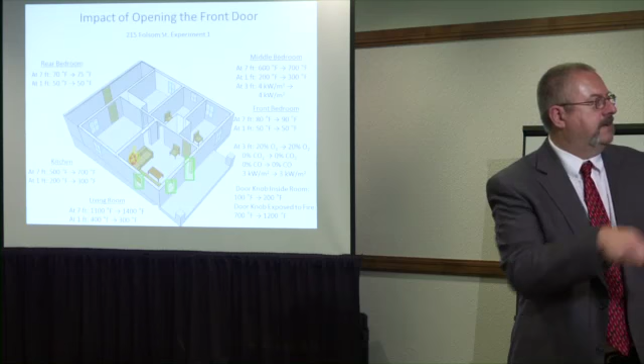And we still have plenty of oxygen, no CO or CO2 to speak of, but the heat flux is going up a little bit. We also had thermocouples on the doorknob, because sometimes you want people to be touching the doorknob and all that sort of thing. So the doorknob in the room went from 100 degrees Fahrenheit to 200 degrees Fahrenheit, and on the fire side it went from 700 F to 1200 F.

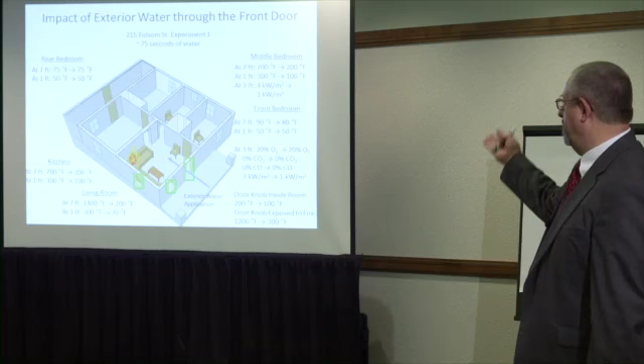Impact of water through the front door, dropping the temperatures throughout the space as you've seen before, and again the front bedroom, even though we had fire rolling the porch and everything, remains tenable. Show you one more scenario here. Again, size up, so you've got smoke showing. Where's the fire?